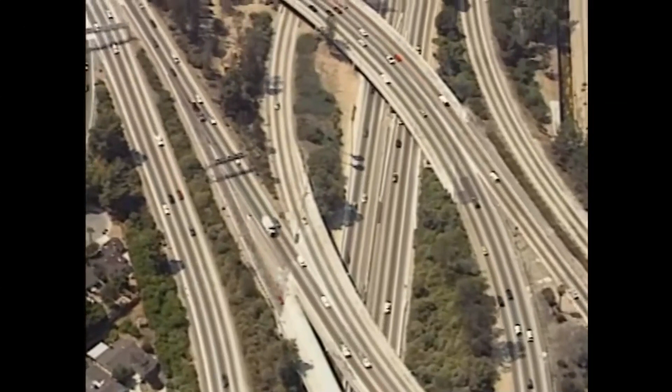California, the Golden State, where opportunity abounds. California, a land of snow-capped mountains, rivers running strong and clear, and a place of rugged, beautiful coastlines. If California were a nation, its economy would rank among the world's 10 largest. California is an ethnically diverse and culturally rich homeland for over 37 million people. The common thread woven through the magnificently varied quilt is our transportation system. This system is the lifeline of commerce and community. The California Department of Transportation, also known as Caltrans, oversees this complex interface of highways, bridges, rail systems, and supporting infrastructure that helps maintain the California lifestyle.

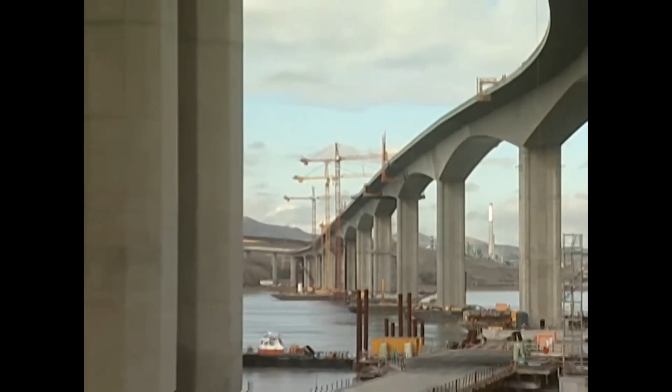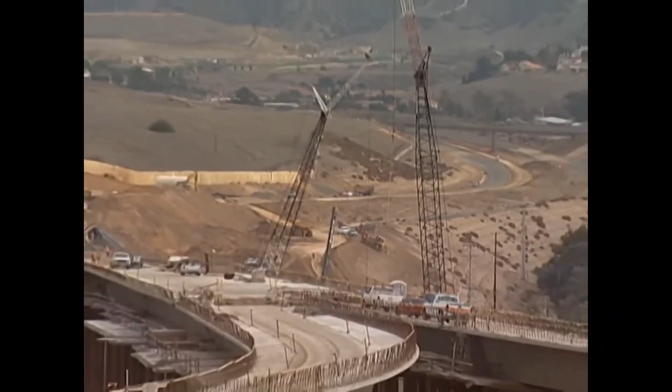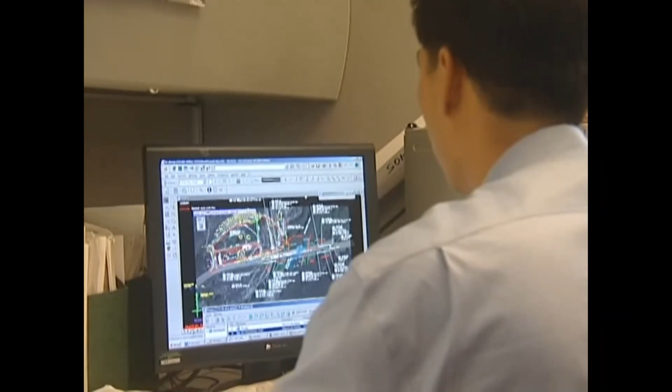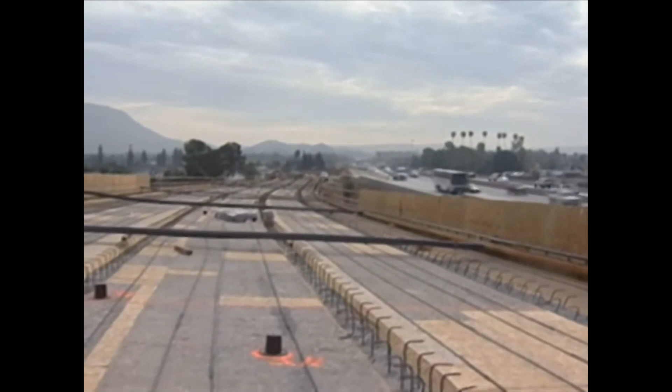Caltrans is a leader in the transportation industry and has earned its reputation due to world-class projects. Caltrans is an employer of choice because we don't just make history, we build it. Caltrans is a dynamic organization where excellence is a way of life and opportunities are unlimited. Caltrans engineers are members of a professional organization with a fiercely proud tradition of setting the standard by which other transportation systems are measured. As an engineer, you will discover your own potential and develop your skills and interests through diversified hands-on assignments. You will have the opportunity to achieve your career goals while working and living in some of the most desirable places in the country.

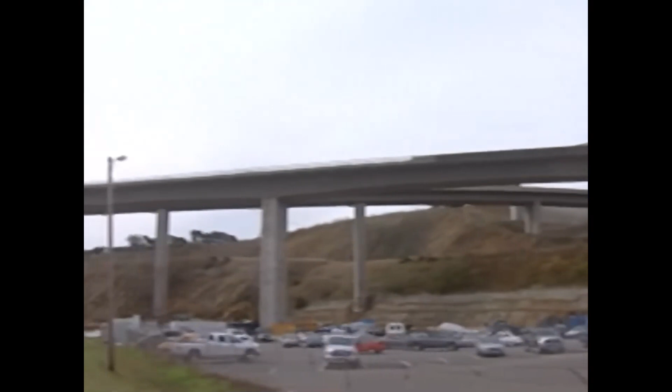Caltrans is searching for engineers and other skilled professionals who want to make a difference. If you have a college degree in engineering or a related science, or are nearing graduation, you may be eligible to join the Caltrans team. I think Caltrans is one of the best places to work at. I plan to graduate in about two months, and I plan to work for Caltrans as a civil engineer. I've been out of school for about 15 months, and now I'm working on a $110 million interchange. And I think it's a great opportunity for a first job right out of school.

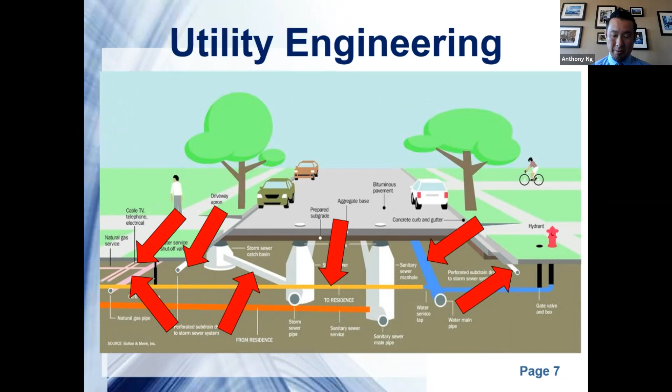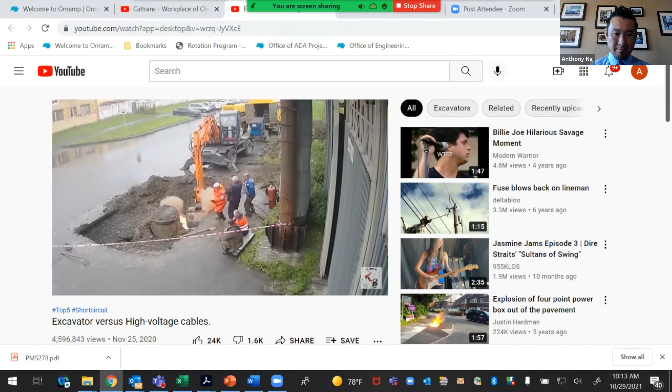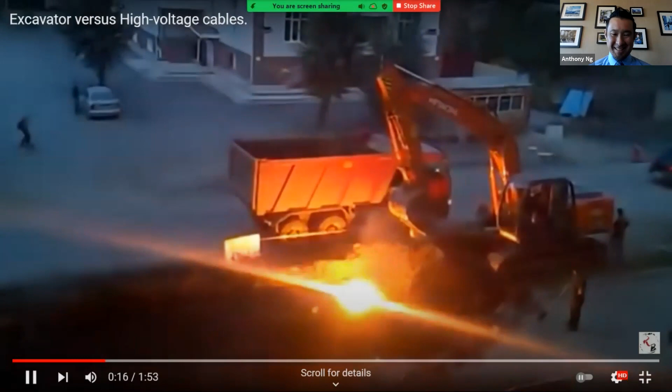Because if you don't do proper utility engineering, this is what would happen. Here they just hit an electrical line. Okay, there's another one where, yes, it could definitely get very dangerous. There's also a lot of gas lines that could be hit.

No, I think you're okay, on your third video now. So yeah, the gas line would be next. Okay, I'll do that real quick.

From the KCAL 9 News studios, I'm Sandra Mitchell, and you're looking at live pictures right now from Sky 9, where there is a fire burning. This is Woodland Hills, and it looks pretty ferocious because a backhoe there, part of a construction crew, has hit a gas line.

Yeah, so if you don't do proper utility engineering, stuff like that would happen.

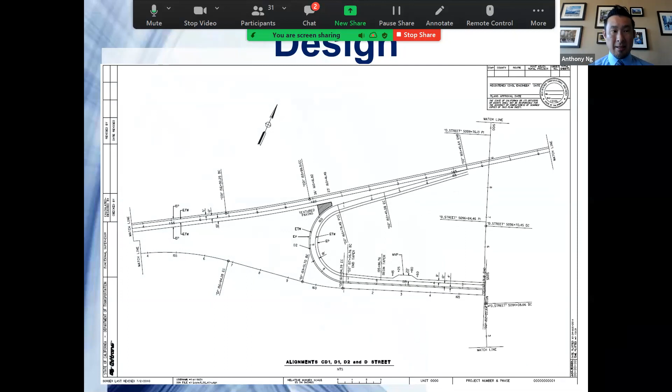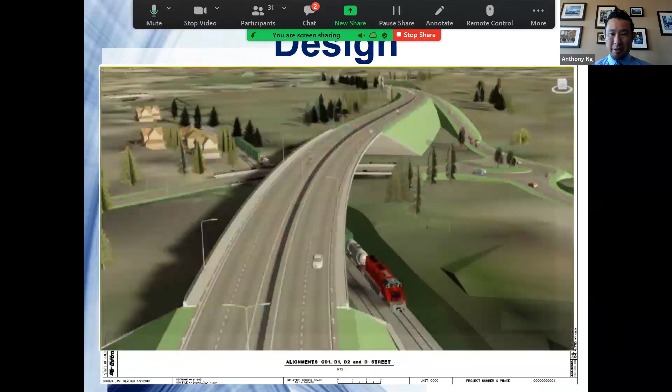So moving on, we also had some interns that worked in the design unit. In design, what we do is we draw out our plans that look something like this, then incorporate them into design programs. In Caltrans we use Civil 3D to turn it into a real design, and once you're done with that, you can even do a rendering to see what it actually looks like.

So now I want to hand it off to Gordon and Luis to give us a little background on the projects they worked on during their internship. Good morning, everyone. My name is Gordon Leung. I'm one of the design managers here at Caltrans District 7.

What you are seeing here is an American with Disabilities Act, or ADA, curb ramp design. This is a capital preventive maintenance project on Route 1, also known as Lincoln Boulevard, PCH, or Sepulveda, depending on the segment. The primary scope for this project is to preserve and extend the service life of the existing pavement by cold planing and overlaying with hot mix asphalt.

Also, the other major scope is to upgrade these ADA ramps for compliance with current ADA design standards and guidelines for pedestrian access, which is also part of what we're doing here for the complete street design.

The image here, it's done as a 2D design drawing. It's done in MicroStation, which is the CAD, or computer-aided drafting, software that we use here.

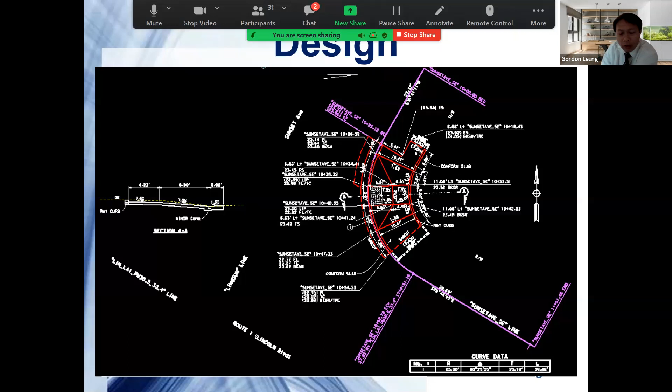For this particular project, we had our interns verify and update quantities using both MicroStation and Excel spreadsheets. Typically this is to quantify construction materials such as removal and replacement of concrete, curb, gutter, sidewalk, and the curb ramps. Now I would like to pass it to Larry. He worked on this project and can elaborate a little more on what he did with this quantity verification and update.

Okay, so in the summer I was in Design A, and I was working with MicroStation verifying curb quantities. Before that, I was doing tutorials within MicroStation just to get familiar with the tools. I was working on a project that, within Caltrans, focuses on highways and conventional highways and roadways.

I was working on this project where, as you can see, there are different streets, and each street had curb ramps as ADA ramps from southeast and northeast. What I would do was use Google Maps and also the spreadsheet to compare and get a visual of where the street is and the ADA curb ramp.

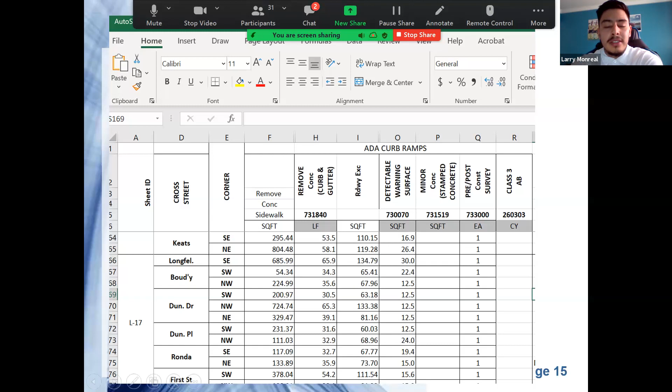From there, I would use MicroStation to identify the curb and gutter, the asphalt, and the concrete, and each was measured in linear feet and square feet. That's submitted to a 65% package, known as a cost estimate. From there, it's verified how much the quantities are and the total of the ADA ramps.

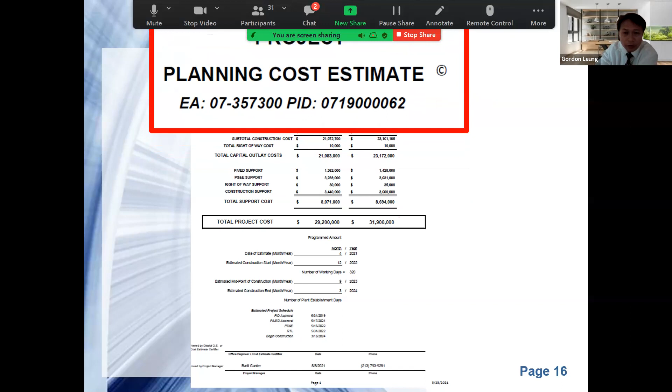Okay, what's shown here is a sample 11-page cost estimate that we use here at Caltrans when we develop reports such as the project initiation document or a project report, prepared during the project inception phase and the project approval and environmental document phase.

This sample here is also for a CAPM project on the I-5 freeway, which is also to preserve and extend the service life of the freeway pavement. Additional project scope also includes replacement of randomly deteriorated concrete slabs, median barriers, and updating the freeway overhead signs.

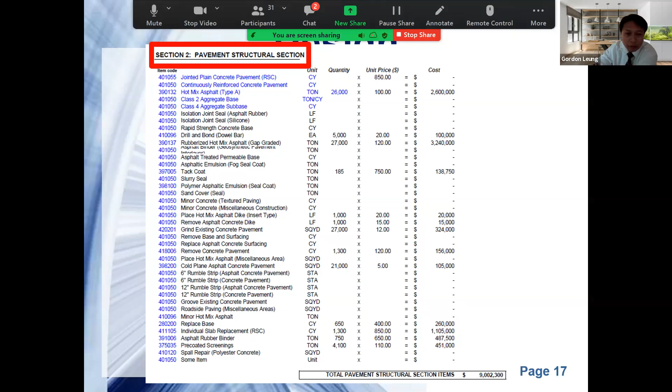The typical 11-page cost estimate consists of three major components, including roadway items, structural items, and right-of-way items. Here at Caltrans District's Design Office, we are mainly responsible for doing the roadway items estimate.

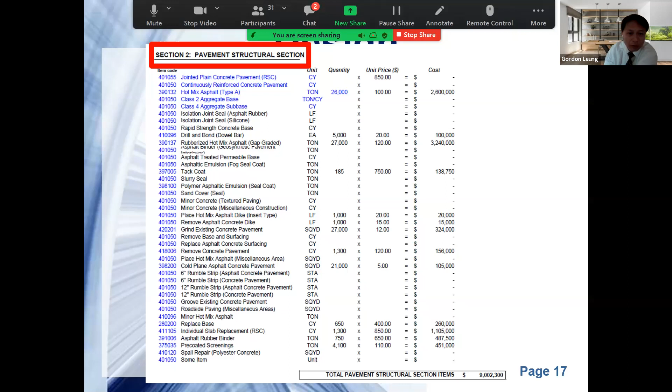The roadway components, depending on project scope, usually include items like earthworks, such as roadway excavation, pavement structure sections for concrete or asphalt pavement, also drainage like culverts, pipes, and inlets, landscape items such as irrigation and planting, and traffic items including striping, signage, and electrical systems.

Here at Caltrans, we have our own unique item codes, which is the very left column you see here, these numbers corresponding to the different item codes that we use.

We developed these estimates using our contract database, which contains historical and the most recent bid prices to find the unit cost. Further to the right is the column for unit price that we use. We use the contract database to find comparable projects depending on size, type, and quantity. That's how we typically develop our cost estimate throughout the different cycles of project development.

I will want to pass it on to Luis for him to elaborate on the projects that he worked on for doing the cost estimation.

Hi, good morning everyone. My name is Luis Orozco, I'm a student assistant in the design department. Can we go back to the previous slide?

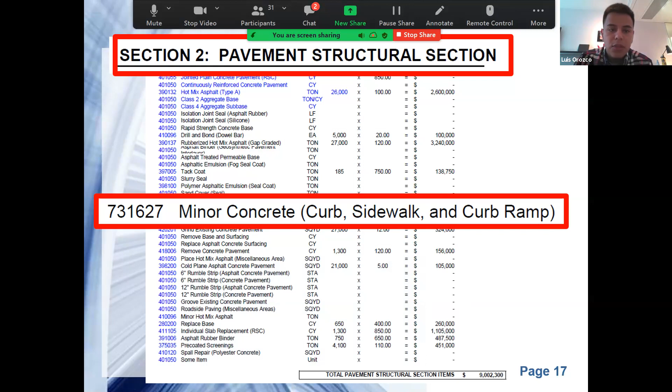This was an estimate that I had to go over when I was doing the student internship. I had to go through the codes one by one, making sure the description and quantity were correct, and then also making sure the cost estimate was correct at the end.

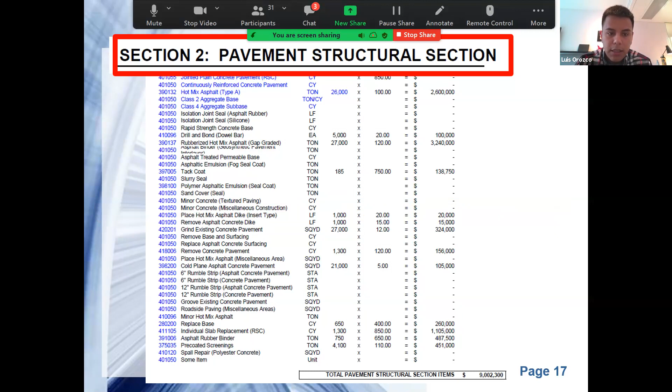If we go to the next slide, this was a field I got to visit. This is on the 101 in Agoura Hills. Right here, this was a bridge that they designed, so it needed repairs, and this was done there.

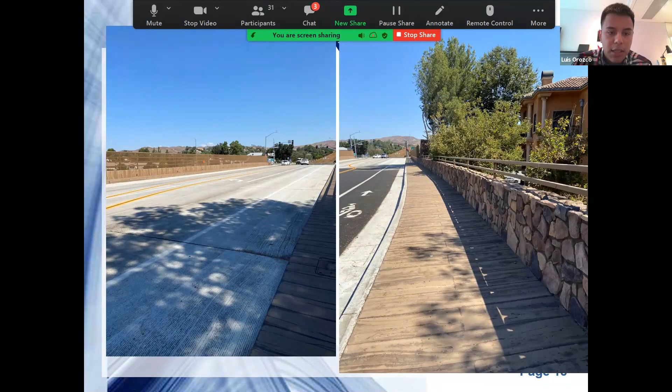If we go to the next one, this is actually the current project that I'm working on, the Liberty Canyon Wildlife Crossing. Basically what Caltrans is doing is building a bridge for the wildlife to be able to cross through the freeway on top, because a lot of animals are affected by this area.

So in order for them to not get run over or anything, Caltrans is designing this crossing so that they can cross safely, and there won't be any issues within the community, because a lot of people have been saying there's been coyotes wandering through their backyard. So the wildlife is being affected by this, and building this bridge is going to help them go through a certain place.

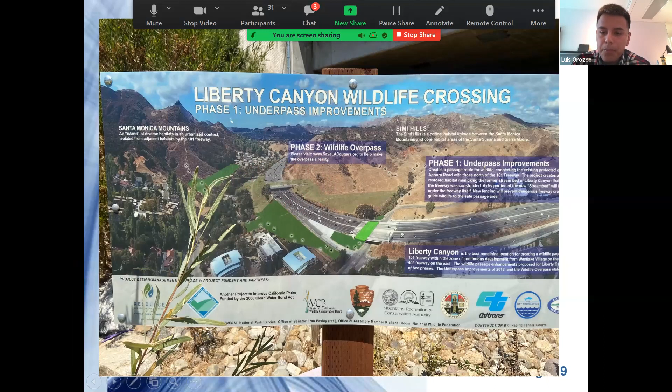Awesome, thanks Luis, and thanks Gordon. So another unit that some of the interns partook in was landscape architecture.

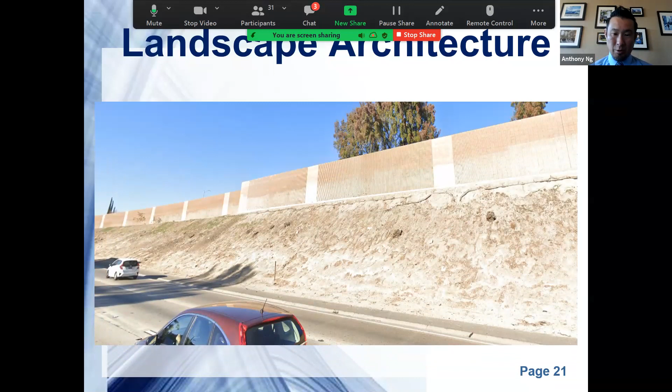One of the projects the intern worked on was what we call a source control project. If you look here, you'll see there's exposed soil, and whenever it rains, all that soil comes down into the drains at the bottom and goes to our stormwater, then ultimately into the ocean. So we want to control the source of where all those pollutants are getting to the ocean.

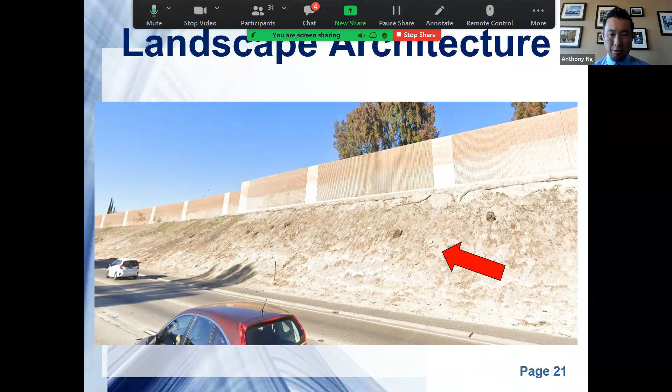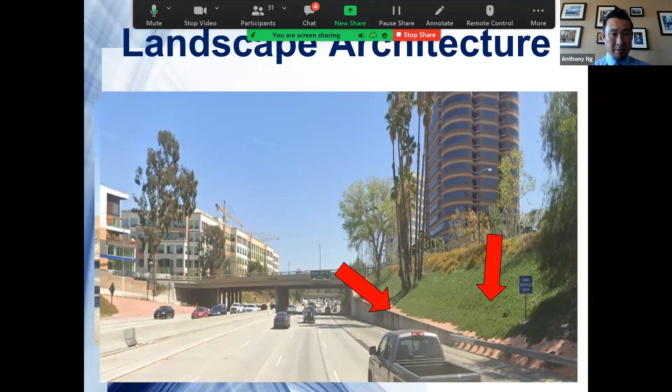This project involved putting in some slope paving and also some vegetation to keep all that soil from going into our storm drains and into the ocean. So this is definitely one of the other units you guys could work in.

Some of the typical tasks, as you heard, people were doing different things, but some of the main tasks people worked on was CAD, computer aided design drafting. In Caltrans we use MicroStation, but I'm sure you've also heard of AutoCAD, which is very similar. It's like Coke and Pepsi, the same, but a little bit different.

The interns also worked on quantities, as you just heard. Once we design it, we need to find out how much it's going to cost, so we need to know how much of everything we're going to need. And also, we have you guys review plans and reports to make sure everything is in order.

So let's talk about the opportunities that we have in Caltrans. Earlier on, we did say that we have opportunities in design, in maintenance engineering, and also sustainability and innovation.

So in going over design, we already talked about utility engineering, roadway design, and also landscape architecture.

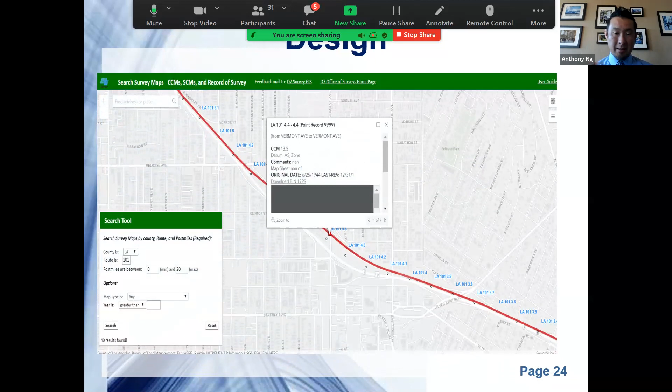We also have Office of Surveys where we have GIS, or geographic information systems. That unit gets all the data and puts it in the database, making it much easier to find, kind of like Google Earth.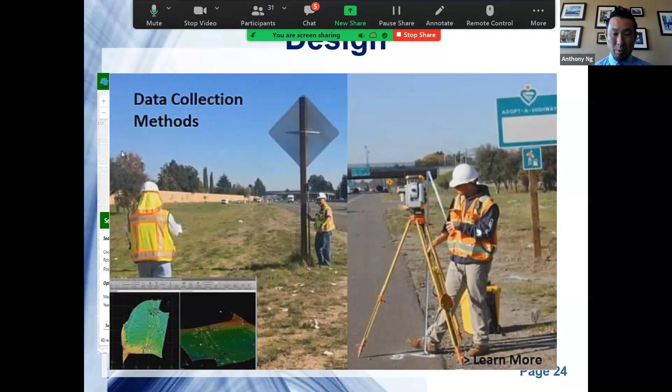And then also we have traditional surveys where you can actually go out in the field and survey the roadway for projects or for construction.

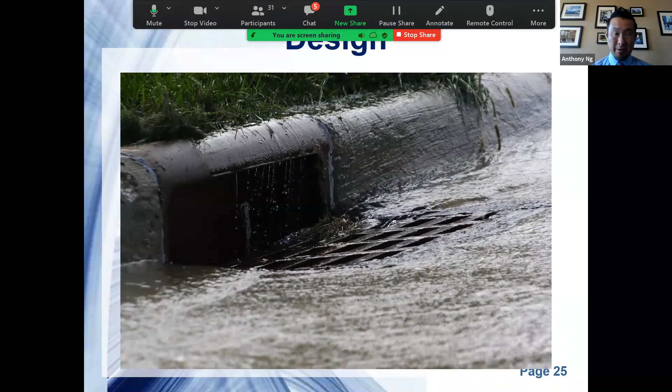They also have the Office of Hydraulics. Hydraulics deals with all the water that's on the roadway, and we want to make sure that it gets off the roadway and into the storm inlets.

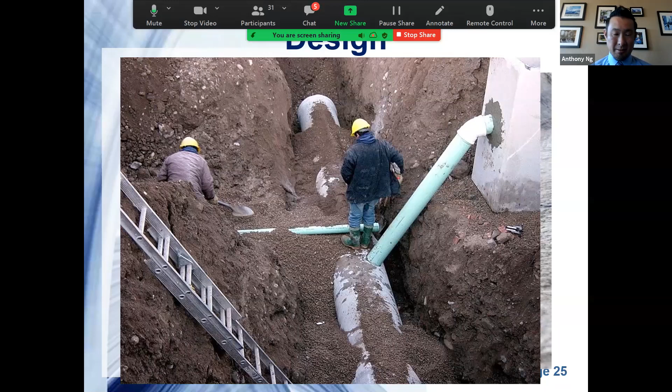So if you're going to be part of the Caltrans team, you're going to be helping design these storm drains that usually we don't see because they're all buried underground. But there's definitely a lot of things going on behind the scenes.

So next, let's talk about the opportunities in maintenance engineering. With that, I'll yield over to Paul Crispi, who's the office chief in maintenance engineering.

Thanks so much, Anthony, and good morning everybody. My name is Paul Crispi. I work in the Caltrans Maintenance Division in the Office of Maintenance Engineering. I'm here to talk to you about some opportunities in maintenance engineering.

We do similar work to the Division of Design as far as designing, but we're focused more on the preservation of existing assets. You may think of freeway maintenance as the orange shirts and trucks you see on the freeway. Those are our boots on the ground, and they're an integral part of highway maintenance.

In addition to that, we have a lot of engineering work and other technology aspects as well. So I'm going to discuss some of those today, like maintenance engineering and design. We also deal with pavement management, major damage and disaster response - so-called director's orders - GIS mapping that Anthony mentioned a minute ago, and lastly, project management.

This slide shows some example plans our maintenance design engineers prepare as a contract plans package for a preservation type project of existing assets. For example, we prepare engineering plans, specifications and estimates for culvert lining work, which you can see on the left side - lining an existing culvert, preserving it, trying to give it extra life, maybe 25 or 30 years, instead of replacing it.

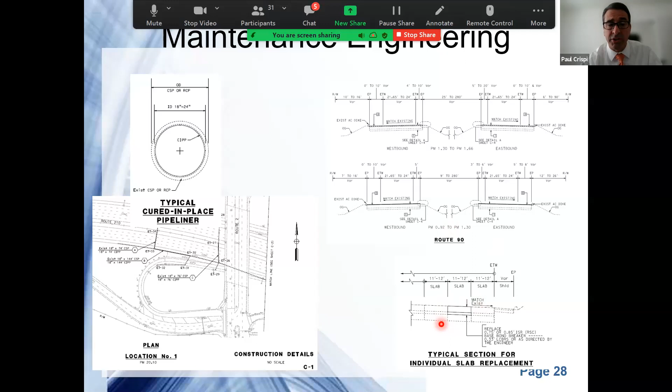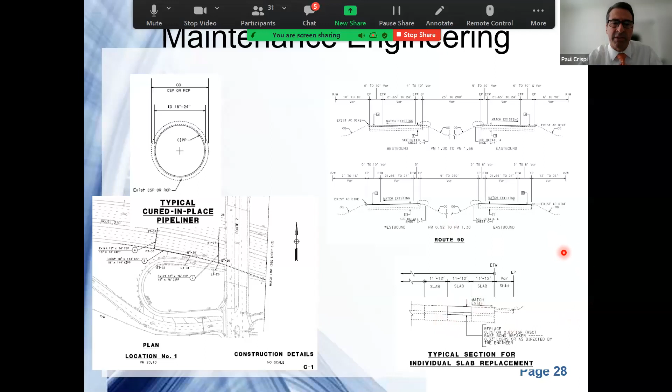And on the right is an example of pavement preservation where we're replacing individual slabs on the freeway, instead of doing a complete lane replacement, we'll just replace damaged slabs. So as a growth sector intern, you would have the opportunity to work with project engineers preparing these plans, using MicroStation CAD software, doing quantity calculations in Excel, and preparing cost estimates based on roadway geometry and cross-section.

Next is pavement management. As you can imagine, Caltrans has a vast amount of lanes to preserve and maintain in both LA and Ventura counties. We use a sophisticated pavement management database called PaveM, and you can see from this slide some of the outputs of that PaveM software in the form of pie charts and other bar charts.

In the upper right-hand corner, you can see every freeway, every highway in District 7. We know the condition of the pavement, and we know the pavement rating. We also use what's called an automated pavement condition survey, which helps the engineer determine if we need a complete rehabilitation of the roadway or just a pavement preservation project.

So there's opportunities for interns to work with our program advisors on pavement using this various software and assist our team in future pavement projects.

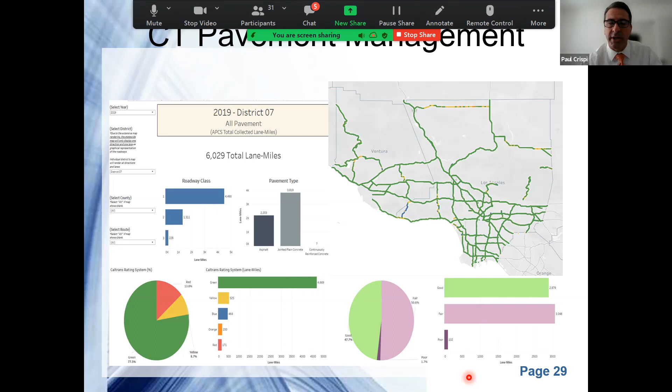Next is our major damage or unexpected emergency response. As mentioned before, our Caltrans field maintenance forces play a vital role, and many times they're the first responder, including CHP, at a major damage event like you see on the screen here - a major washout of one of our roadways.

But what happens after the major catastrophic event occurs, such as a mudslide, a fire, or a washout? Caltrans has a group of field maintenance engineers that go out to the damaged sites and give an engineering assessment of the damage. They work with other professionals in the geotech and hydraulics areas to make recommendations for repairs. A growth sector intern may have the opportunity to perform field visits to major damage, take field measurements, and calculate roadway quantities and estimates, working with a group of professional civil engineers.

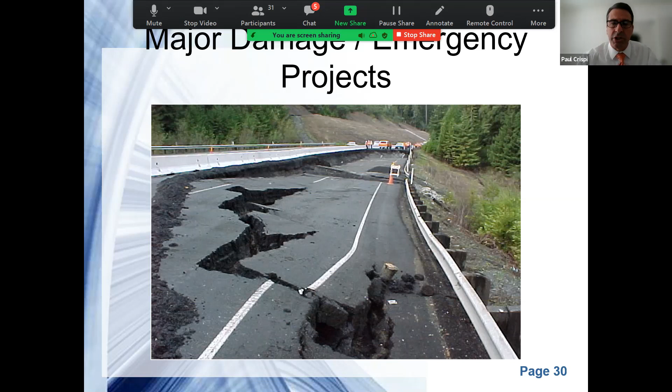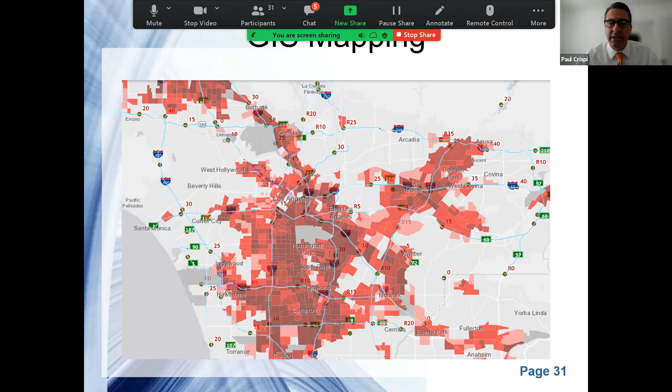In addition to GIS mapping in the Division of Design, the Division of Maintenance also has a group of data research analysts that create various maps using GIS software. There's huge amounts of key data that the team turns into graphical, easy to read GIS maps. Here's an example of a GIS map prepared by our team showing levels of underserved communities, which is very important for Caltrans to make determinations on projects right now. The various shades of red there were done with GIS mapping. You may have the opportunity to work with our GIS team preparing these kinds of maps.

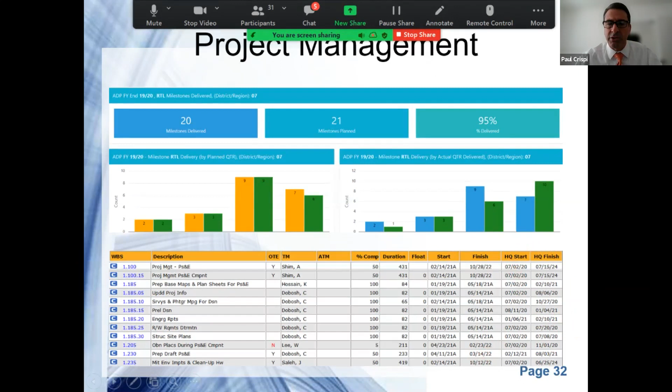And lastly, we have project management opportunities. Maintenance project managers create new projects, which include defining scope, preparing schedules, and cost of projects. Project managers keep track of budgets and resources, the amount of engineering needed to deliver a project, broken down into individual tasks. Each task is broken down into a duration and the amount of resources needed to complete it. Student growth interns may have the opportunity to learn the basic principles of project management, assisting the project managers in maintenance engineering. That concludes my presentation.

Thanks for your time. Back to you, Anthony. All right, thanks a lot, Paul. So I'm actually getting a little excited about maintenance engineering.

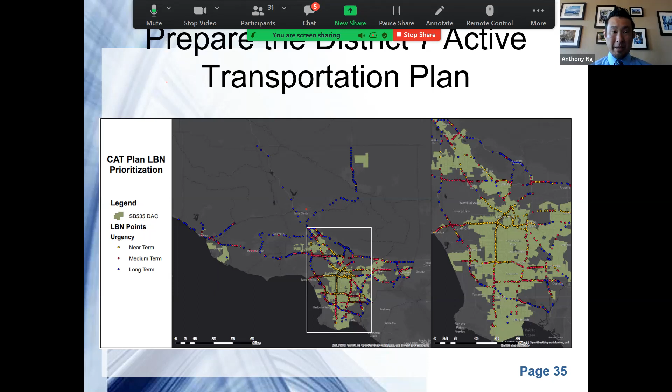Moving on, last but not least, we also have opportunities in our Sustainability and Innovation Division. This group does a variety of different things. One is they plan bikeways and pedestrian improvements. They prepare our district's active transportation plan, which is like a master plan for bicycles and pedestrians—it's called active transportation because they want people to be more active, to get out of the car and be out there on bikes and scooters. They're also big proponents of increasing transit use, prioritizing environmental justice, and building community partnerships. The key thing is they're trying to promote equity throughout all the different communities we go through.

One other thing they're pushing is to ensure adequate electric vehicle charging stations, because we have mandates—I think it was 2035, where there won't be any more gas-powered cars sold. So unless we get our infrastructure set up for that, that may not be happening. Another thing they're pushing is renewable energy—within a lot of our park and rides or facilities, they're trying to promote solar energy.

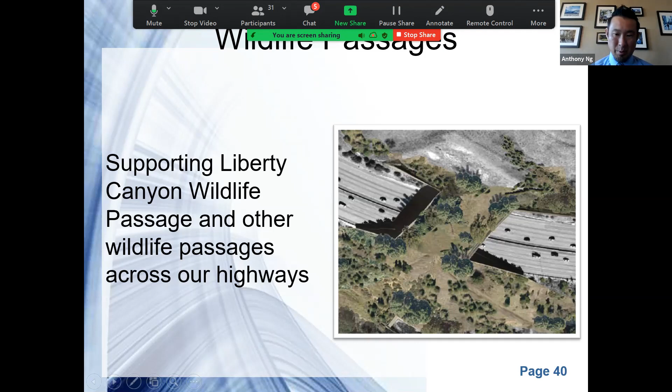And also, kind of like what Luis was saying, he's currently working on a project called Liberty Canyon, where they're trying to make things work with the environment. The proposal is to construct a bridge with actual trees and vegetation on top of it, not just a roadway, so animals can safely cross the freeway instead of having to jump around between cars. And last but not least, they're also looking to the future and trying to help with climate change, or reduce climate change.

Now let's go over some testimonials from our previous interns, or actually, well, now current interns as well, but previous growth sector interns, to get their insight on the benefits of being a growth sector intern. So now I guess I'll open it up for Larry or Luis, if you guys could share some of your insights on what your experience was being a growth sector intern.

I'll go first. Benefits as a growth sector intern: you'll develop some hands-on experience. As mentioned before, I was doing MicroStation, also known as similar to AutoCAD, doing curb and gutter quantities, figuring out the quantities to be submitted for the PS&E. Also, I used a little bit of Civil 3D, setting off stations, which is the beginning and end of work for surveyors to stake out on the job site. Besides the hands-on experience, I also experienced reading some manuals, such as the highway design manual and the project manual.

It's a lot of reading, but reading is a big part of knowing the concept behind it before working on projects. Civil engineers day to day are always reading manuals and following rules and laws throughout their projects as they're working on them.

Good question. The sustainability and innovation division is actually a relatively new division, and they're trying to do as much as they can. Unfortunately I'm not part of that division, and those people couldn't make it this morning, so I had to present for them.

But they're trying to look at any way they can to innovate anything we currently do in Caltrans, and also to see whether what we do now is sustainable, because some of the things we've done in the past haven't necessarily been sustainable. The case in point is bikeways.

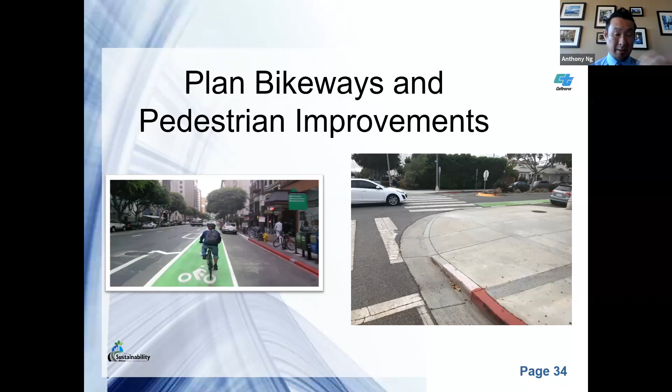Just building new freeways isn't necessarily sustainable because population keeps growing and we can't just keep adding lanes. So one way they're trying to work it is to help plan bikeways and pedestrian improvements, even within the state right of way. If more people are walking, taking transit, or even taking bicycles or scooters, that takes off the pressure on the need to add lanes to the freeways.

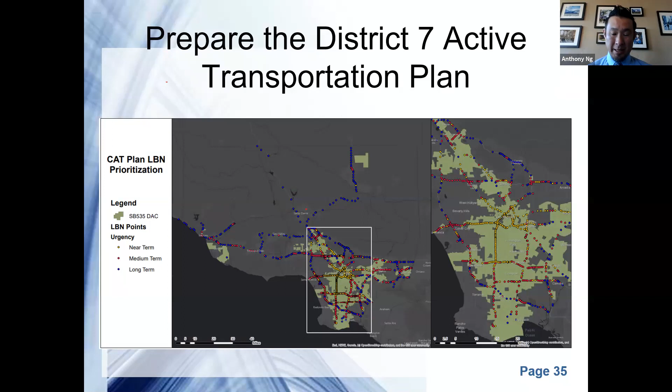So, like I said, they're working on a lot of different things. One is to promote active transportation, which includes bikes and peds, but also transit use as well.

Some of these are kind of high level, like environmental justice. They want to make sure that whatever we put out is equitable, kind of like that database that Paul Crispi was showing. We want to know where the underserved communities are, because before we never really looked into it. We just built a new freeway and cut through whole communities, splitting them in half.

So this is more of a high level thing, and a lot of what the sustainability group looks at is high level, trying to make global changes at least within Caltrans in our district. It's everything that was talked about before, but all in the direction of sustainability, basically lots of planning and building, just oriented that way.

Exactly. Yeah, each one of these things has a lot of detail in it, so we didn't have too much time to go into much detail. But if you look at it from the sustainability standpoint, that's the bulk of what they're looking into. They're also trying to see if we could do some innovations as well.

So just to elaborate a little more, Anthony, the Division of Sustainability and Innovation includes primarily transportation planners. They work with a lot of our engineers, coordinating throughout the project delivery process, including planning, design, and leading up to construction. On the innovation aspect, they lead our ideas committee, looking for opportunities to streamline processes and develop new policies and guidance to make us a more efficient department.

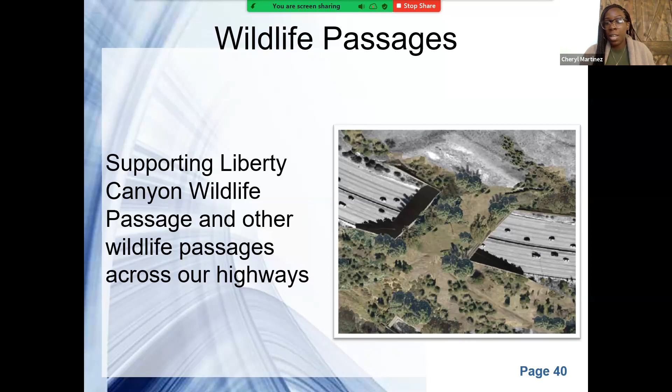Anthony, kind of going along with that, maybe you and the team can speak about the ideal qualities you're looking for from potential interns, and then also that transitionary piece. With the STEM core / growth sector internship placement, these are 10-week placements that growth sector sponsors. However, some of our students have been able to transition to ongoing roles with District 7. So if you can talk about the skills you're looking for from students, and what that potential looks like for transitioning from a growth sector internship to an ongoing placement.

Okay, I'll start it off. Right now, we're really looking for people with a good attitude and willingness to learn, because we understand you're still in school, and we're open for you to come in and learn as much as you can, or as much as you want. So as long as you come in with a good attitude and willingness to learn, that's the minimum we're looking for.

And any specific major?

All right, I'll go. Ideally, for Caltrans, primarily we have civil engineers, and all the different units we talked about require a civil engineering degree. But we also have others — in headquarters we have structures, we have geotechnical engineers. And like Derek was saying, for the sustainability and innovation division, those are planners, so any type of planning degree would help, like urban planning or transportation planning.